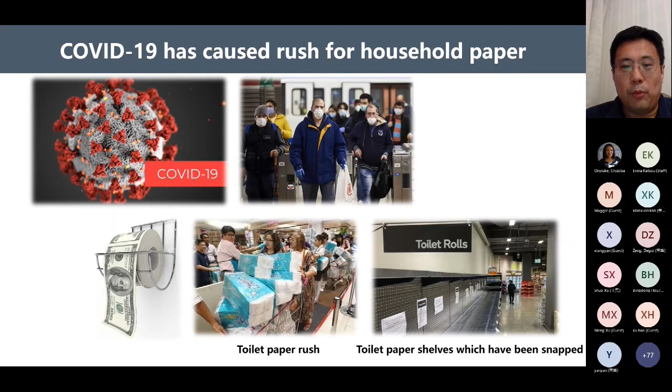So today I'm going to address a little bit about cleaner production and life cycle thinking in a particular sector, pulp and paper making, towards carbon neutrality. We have seen this kind of phenomenon in the last 1 or 2 years, because of COVID, a lot of people went into shopping malls and bought a lot of toilet paper, and the shelves were empty.

In the modern era, there was a prediction long ago saying that paper consumption would decrease. Actually, it's not. Because of economic and industrial development, the improvement of living standards, other reasons like using paper to replace plastic, and most significantly, online shopping in the digital era, there is actually more consumption of paper products nowadays.

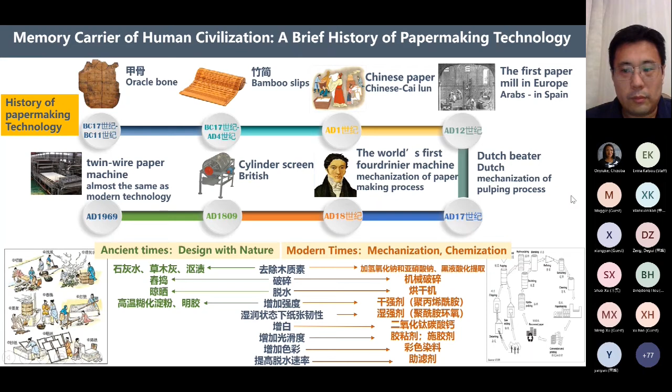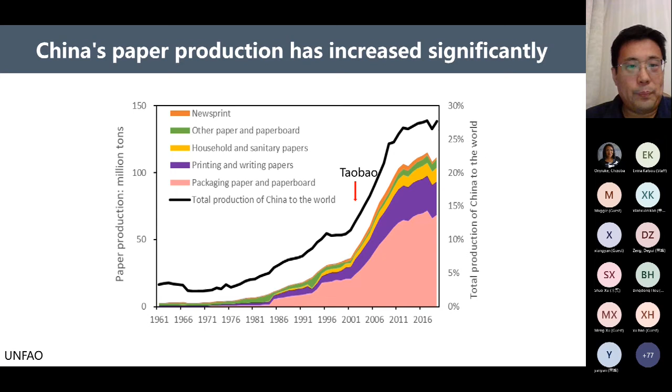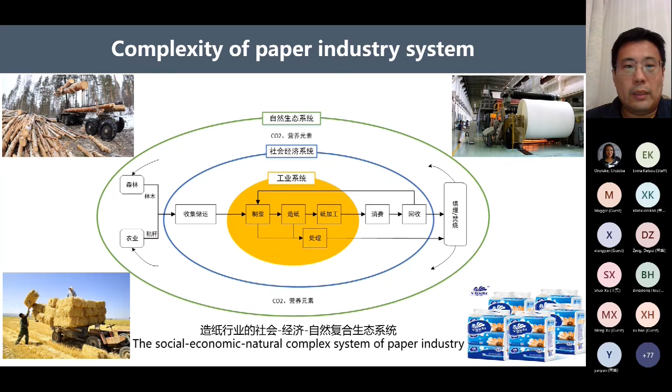Here we want to address a little bit the paper making system. The paper manufacturing and consumption system is really a complex system. It has the industry sector inside, but is also surrounded by the socio-economic system. And outside of that, it's the natural ecosystem. So this sector has its own features that add to the complexity of its system.

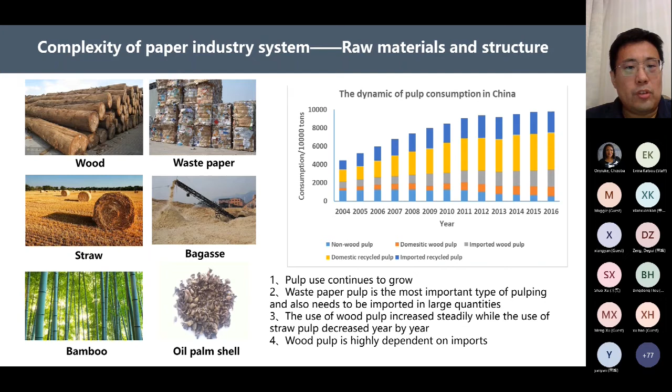First, we want to look at the raw material structure. There are different raw materials, including wood, which is more widely used in Western countries for paper making. And for quite a long while, China and India had straw pulp as their main material. However, later, because other things changed, the material structure also changed. This is a very typical production process and technology used in the paper industry today.

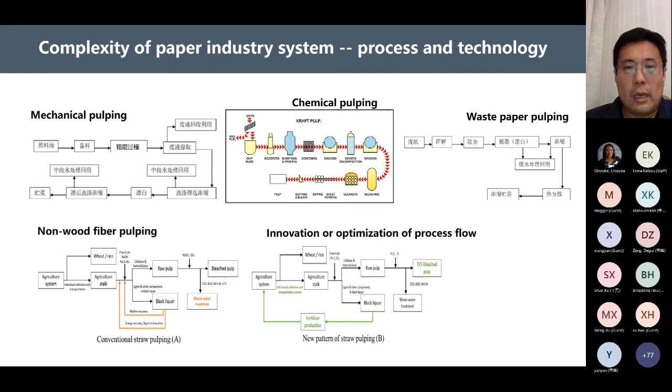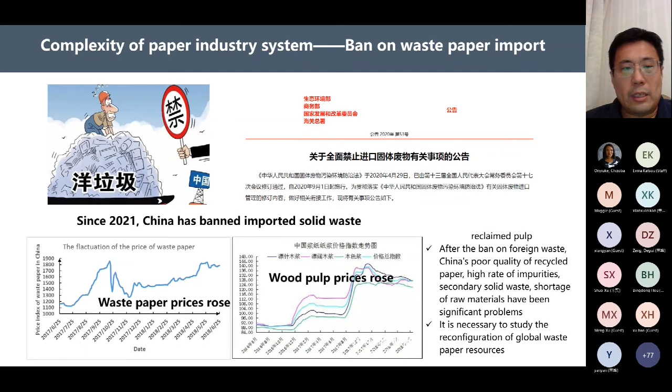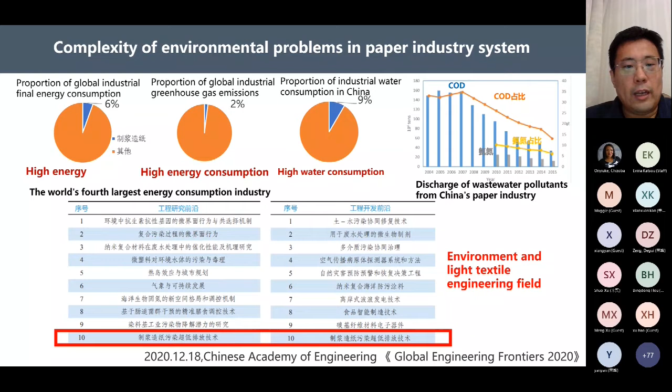Also, there is a policy agenda. For example, China has banned the import of solid waste, including waste paper, since the beginning of this year. So those things add to the complexity of this sector, and also the high energy consumption of this sector. According to the International Energy Agency, the paper making sector is the fourth largest energy-consuming manufacturing sector.

And also taking China as an example, they're changing all the time for the environmental regulations. So the enterprises have to cope with those stricter environmental standards and regulations, and not to mention that today they have a new target for carbon neutrality, and then the enterprises need to adjust either their technology or management system to meet the new requirement.

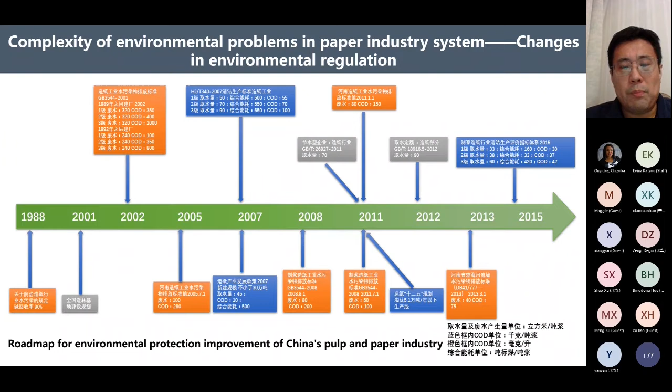We can see there are a lot of trade-offs actually in this sector. From the material, either you're going to use wood pulp or straw pulp. Actually, traditionally, as I said, in China and India a lot of straw has been used to make paper. However, due to environmental regulation becoming stricter and due to the technological complexity, wood pulp is, let's say, easier for achieving the emission standards. This is not about carbon, but about the other pollutants. Because of the strict environmental standards, many enterprises have to shift their source from straw to wood.

However, there are other benefits actually to using straw as the main source for paper making. So there are quite a few trade-offs in this sector, especially today if we're talking about carbon neutrality targets for this sector.

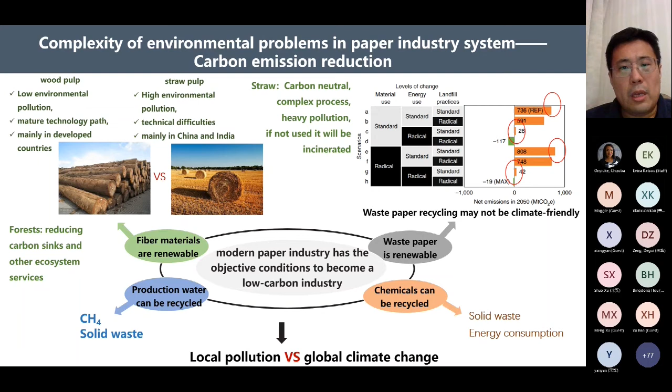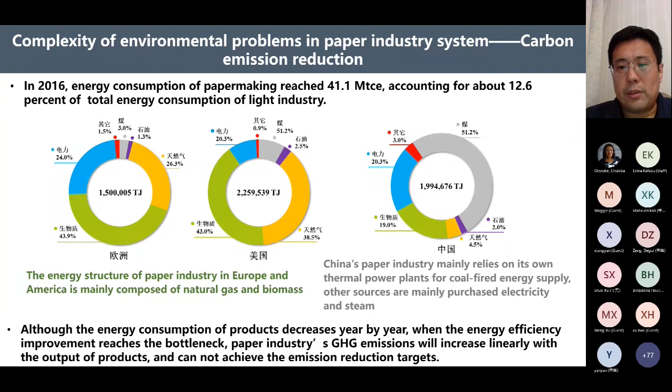So this is the carbon emissions for China, Europe and the United States for the paper making sector. We can see that in China, the paper industry, because of China's energy structure, gets over 50% of its energy from coal. So actually, that's the main source of its CO2 emissions.

We call it the 30-60 targets, the carbon peak and the carbon neutrality. Paper making has already been included as one of the 8 main sectors regarding their low carbon emission for the 30 and 60 targets.

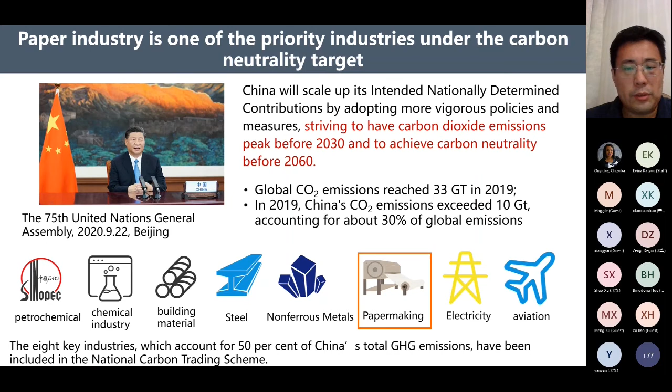So in order to have a better understanding of this sector, we employed lifecycle analysis on the different technology pathways to evaluate their environmental impacts from a more comprehensive perspective. And we have also done a benchmark study using meta-analysis to study the paper making sector across the whole world, to try to see the benchmark of this sector, especially for carbon emissions. This paper has already been published in Renewable and Sustainable Energy Reviews.

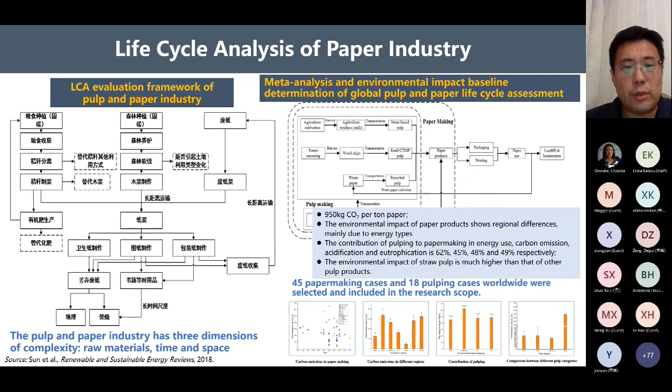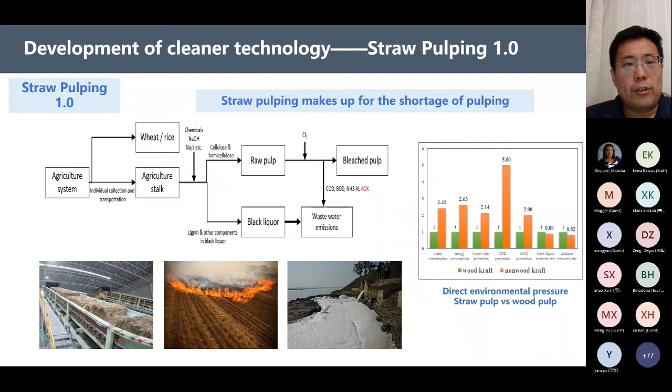Here I want to address a little bit the cleaner production development, especially for straw pulping. This is the very early stage of straw pulping technology, which generates a lot of environmental issues, pollutants and CO2 emissions as well. Later, we employed quite a few clean production technologies, including black liquor alkali recovery and energy recovery, so that quite a few of the materials and energy can be recycled on site.

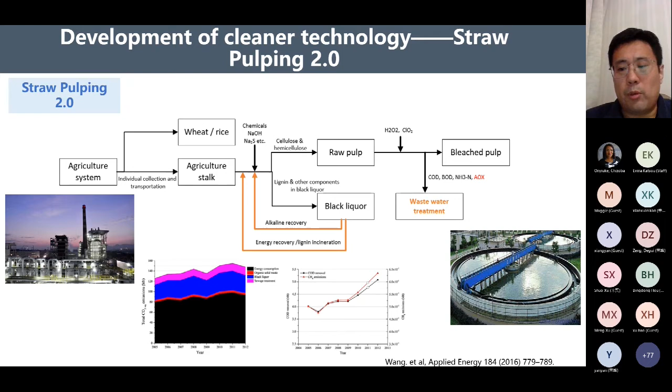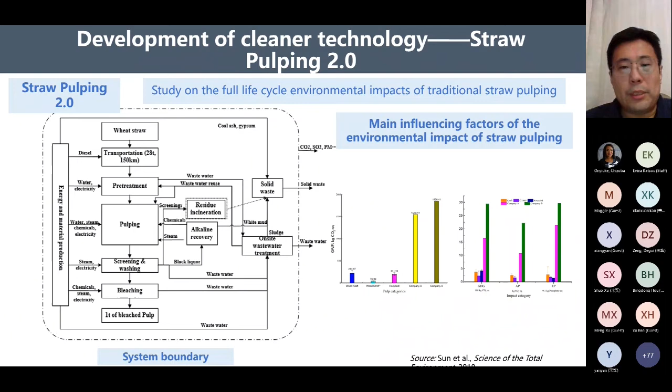And we also did a study six years ago on the methane emissions from wastewater treatment plants for the paper making sector in China, and how much of those biological materials could potentially be recycled for the whole sector in China. And from the life cycle perspective, we can compare different companies with different technological routes.

And here is a new model. We call it the Tranlin model because it was first developed by this company, which relies on straw pulp. They have introduced a series of new technology routes, turning the black liquor back into fertilizer, which, if you are familiar with life cycle analysis, will change the scope of the life cycle assessment.

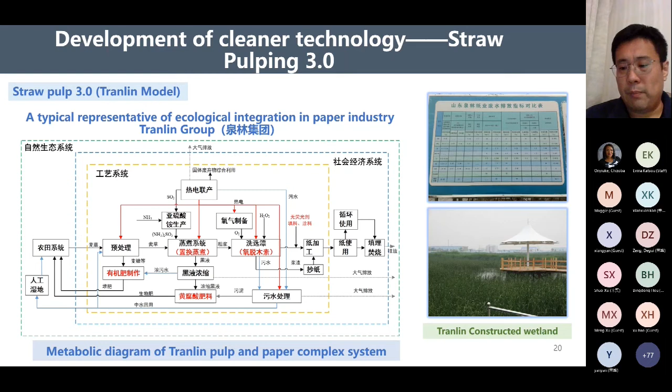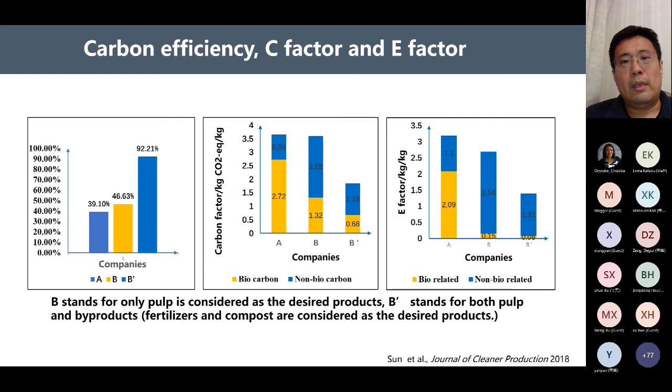And they also have what we call an ecological integration process, with a constructed wetland as part of the wastewater treatment facilities, to reduce the direct energy use and other materials used to treat the wastewater, achieving a better performance. We can use biological carbon metabolism analysis and other eco-efficiency analysis to compare clean production stage 3 to the early stages.

So we can see the Tranlin model has actually been considered very successful by using straw pulp, which is technologically more difficult than wood pulp, to make clean paper with less emissions.

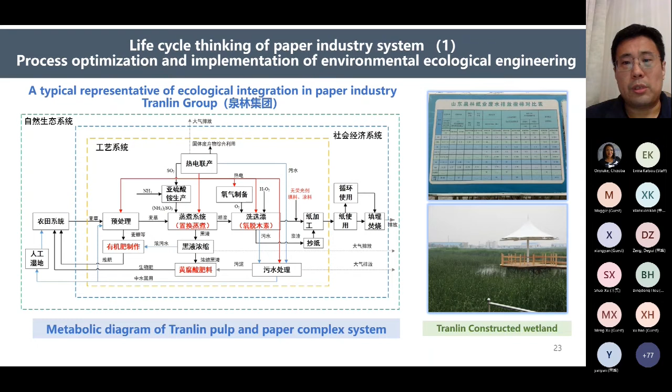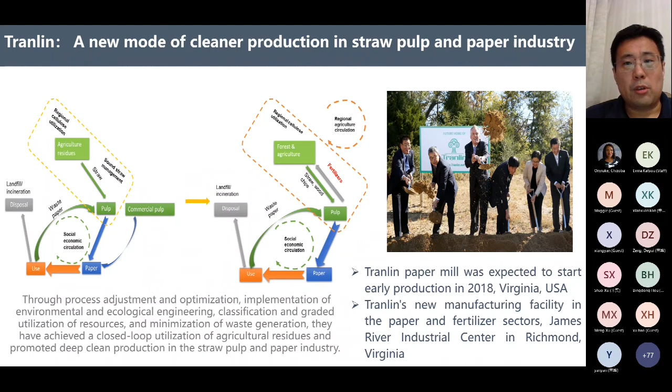So we have done a lot of studies about the details of how much was achieved by the Tranlin model. Actually, it was a very successful model, even being introduced to the United States to have a new production facility there. Unfortunately, due to COVID and other issues, the targets in the United States have not been fully fulfilled.

So considering the carbon emissions for this sector, there are several pathways we can consider to reduce its carbon, because it's heavily relying on coal energy here in China for this sector. I think first of all, optimization of the energy structure is very important. This is very easy to understand.

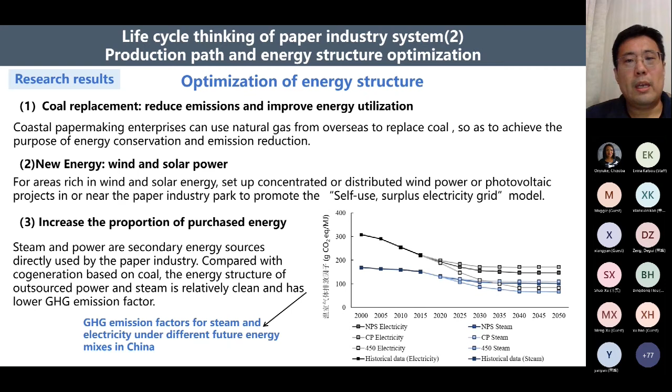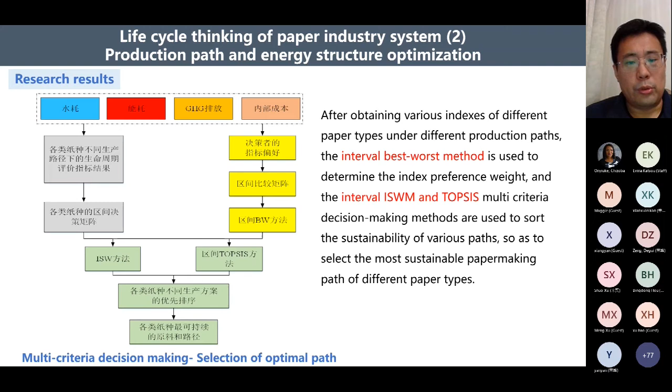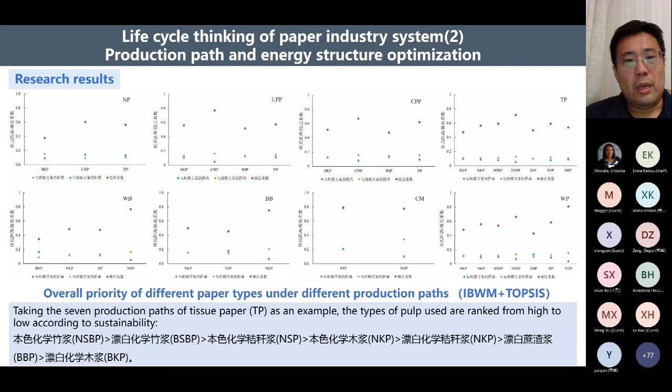And also, we can have optimized ways to study the on-site production chain to have the optimal path. I'm not going to address the details here. So by using this kind of optimization process selection for the technical paths, we can choose the best production paths for the companies and reduce their energy use and carbon emissions as well.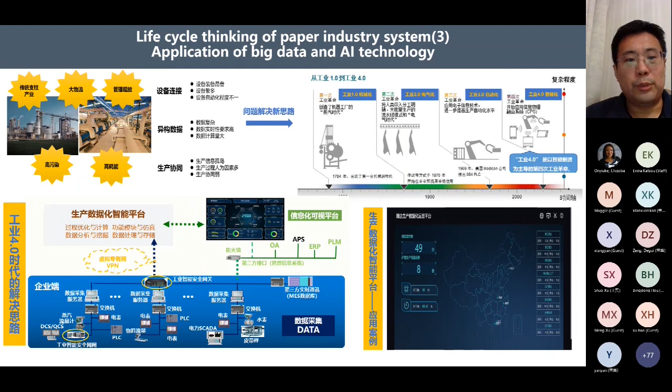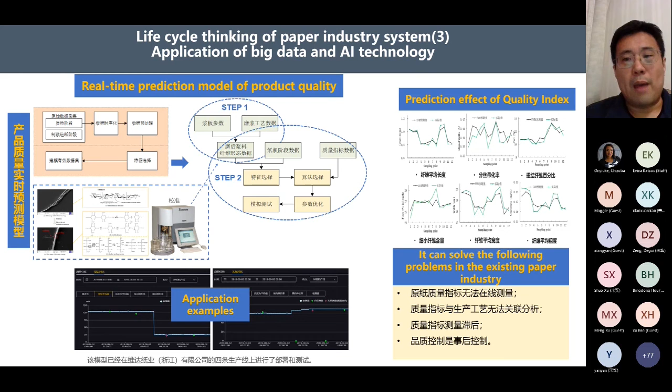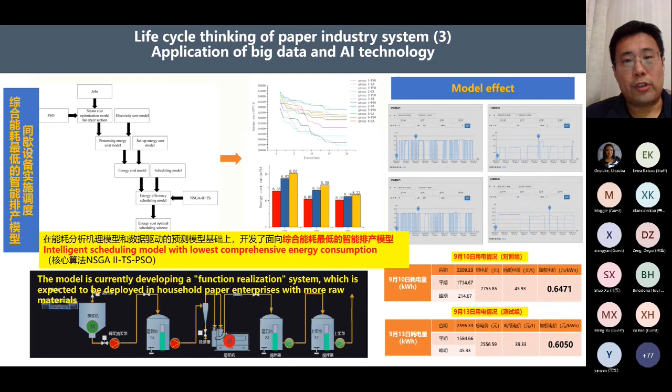And then we can also use big data and AI technology to help the companies develop digital systems, digital twins for example, and use artificial intelligence methods across the whole production line to reduce unpredicted stops of their main machines and also make sure of the quality as well. So those can all be very helpful to help the companies reduce their energy consumption, which is their first concern, and also the carbon emissions as well.

Also, when talking about the carbon neutrality targets for this particular sector, we also need to address its own carbon neutrality standards. We know there are PAS 2060, the ISO standards, IPCC principles. However, for a particular sector, because of its own features, from the life cycle perspective there are different factors which need to be considered for carbon neutrality and carbon emission accounting.

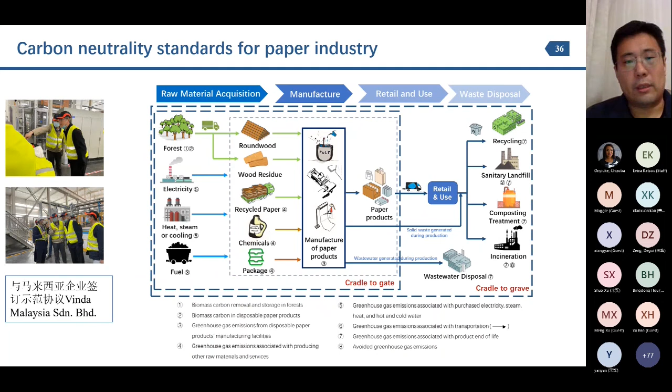So here we designed carbon neutrality standards for this sector, and we have been working with a few international companies and international organizations to try to release this standard as soon as possible. It is also being used in Malaysia with Vinda Group to study their carbon emissions and for their carbon target management and governance.

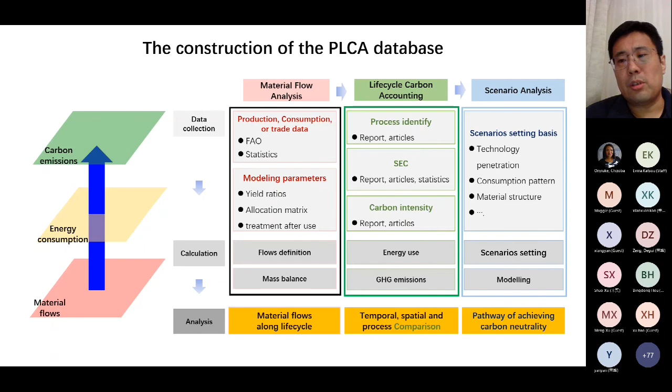Also, we have built the global paper industry lifecycle carbon accounting database. This will be very useful, especially for companies which have carbon neutrality targets, because many companies today have supply chains all across the world, so we need data from different countries. This is some work we have just recently finished, built upon material flow analysis, the different technical pathways of papermaking in different nations, and the energy consumption and carbon emissions for the whole life cycle.

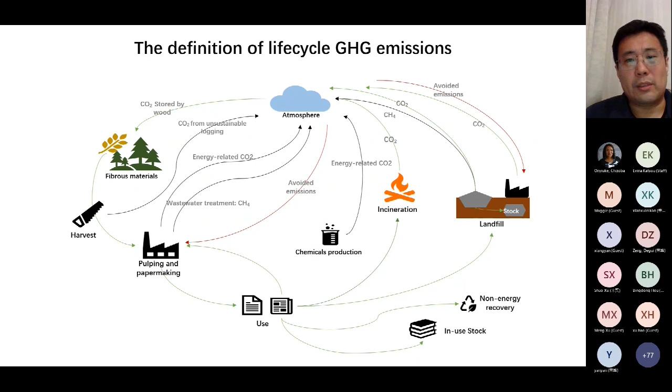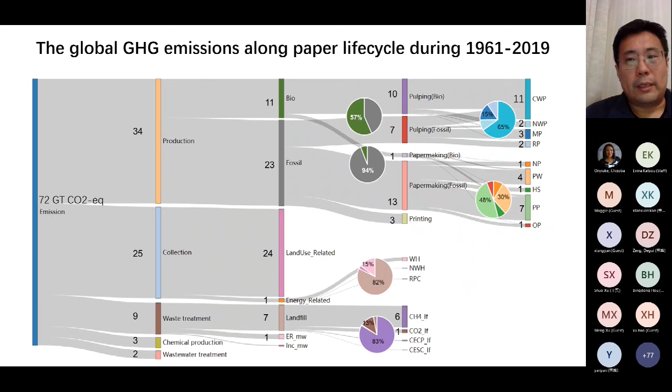So this is the whole system of this work, and this is about the emissions. The carbon emissions have been considered in this data set, and this is the structure of the paper carbon accounting database. This is a long-term database which we developed from 1961 until very recently, 2019. We can have different views for a country in a certain year, but we can also see the accumulated carbon emissions for different countries considering the whole life cycle. It will tell us different messages. Due to time, I'm not going to address too much here.

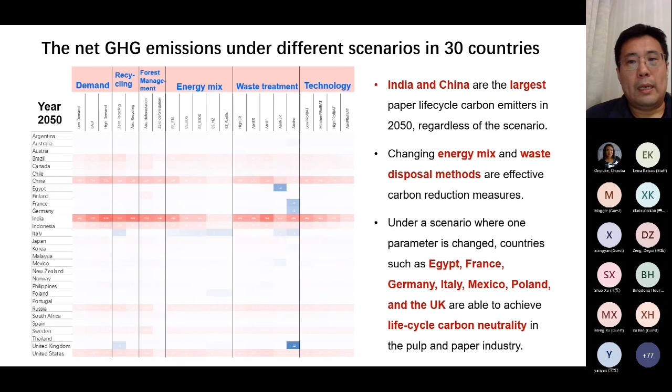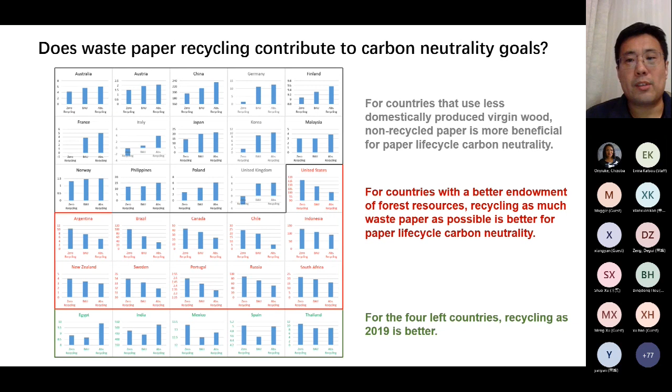Actually, we also make scenario predictions according to the carbon targets for different countries. It is different, especially for countries with a better endowment of forest resources: recycling as much waste paper as possible is better for paper life cycle carbon neutrality. But for countries that use less domestically produced virgin wood, it's a different story. So there are more things to do towards carbon neutrality for this particular sector.